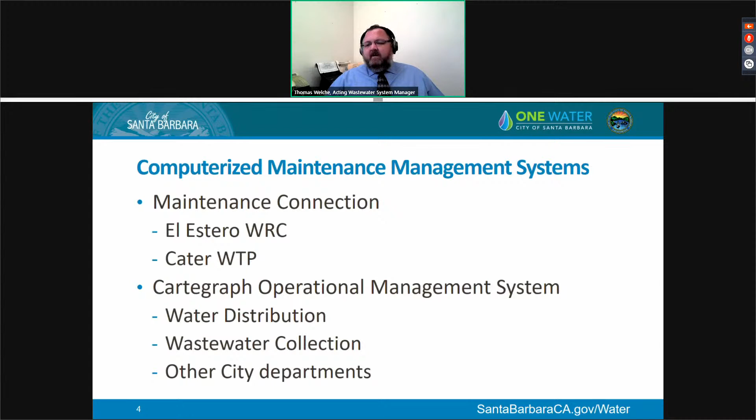As we began to develop these asset management practices in our work groups, we realized that our field crews could not effectively support their programs with their current job roles. It takes a really specific skill set when we need someone to be a CMMS administrator, an inventory manager, an in-house procurement specialist, capital program coordinator, and a maintenance expert. So the planner scheduler position was created.

The most basic function we need our planners to support is to maintain the records of what we own. Once we have that valid understanding of what we own, we develop programs to best maintain and repair it. Work orders allow us to track the who, what, when, where, why, and most importantly the how much around our work. Inventory control, procurement, and managing complex work plans are all about providing our field staff with the tools they need to be successful and work effectively.

Now that our programs have evolved into the most recent paperless forms, our field staff are able to collect much more data, significantly more efficiently, and with less manual data entry. That's freed up our planners to do much more analysis of the data and turn it into valid information that we can use to make smarter decisions.

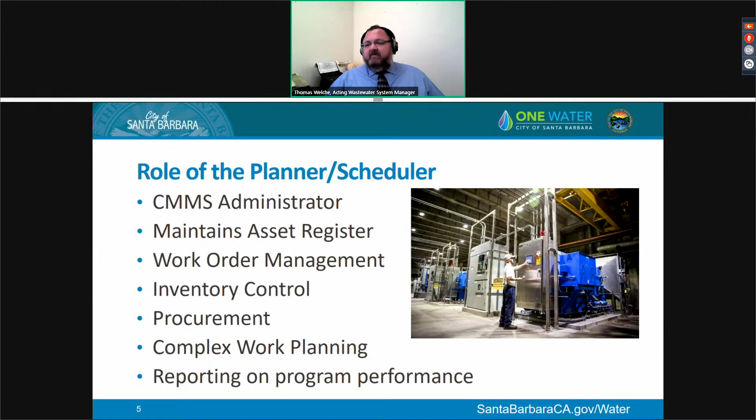At this point, I'd like to introduce Todd Heldoorn, the superintendent for El Estero. Todd's preparing to retire this year, and at his last budget meeting with Paul Casey, the city administrator, he was asked what his proudest accomplishment of his career was, and he said it was developing this asset management program. Todd's been a mentor to me in my career, and he's always been a champion of asset management since we started. So I can't think of anyone better to give you a history of how we got here than him.

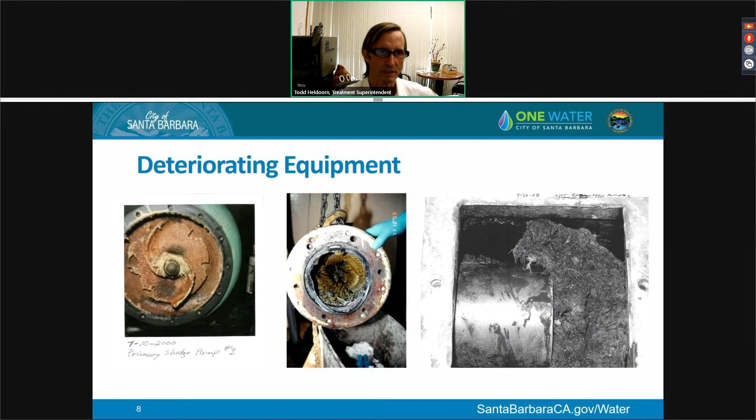This is a really common sight. We cleaned a lot of this stuff out, but we didn't have an upstream effective screening removal system to remove debris from the wastewater entering the plant. That was a serious issue at the wastewater plant and caused a lot of issues.

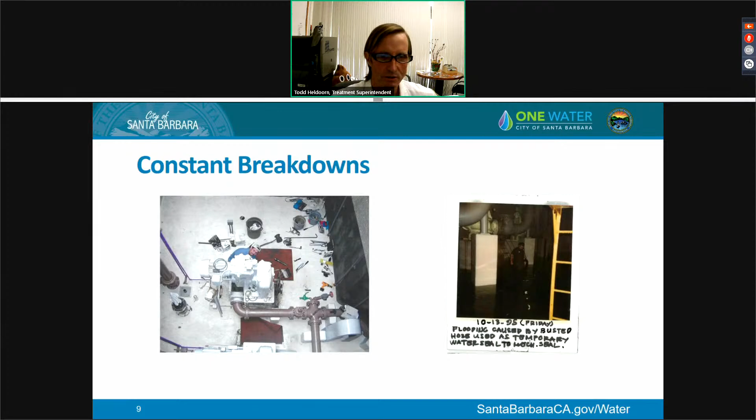This thing was fraught with what we call single points of failure. So if something went wrong with that vacuum hose or that vacuum, it was an emergency - we had to get those rags out of there. It was never ending, never stopping. Jim Armstrong, during this whole project upgrade process, asked me about it one time and said, 'Oh, that's that Rube Goldberg contraption, isn't it?' And I said, yeah, that's what we're working on.

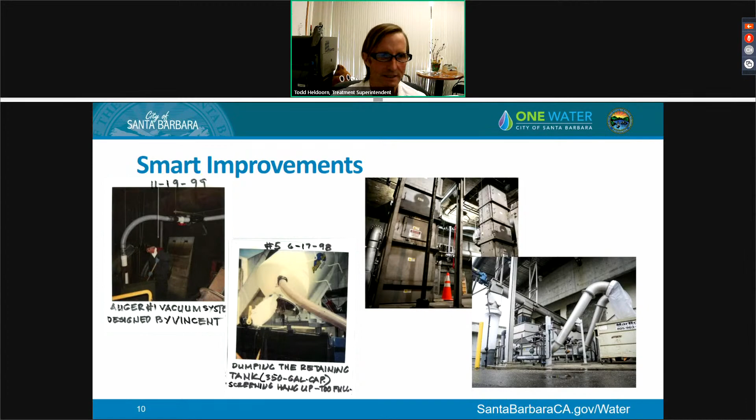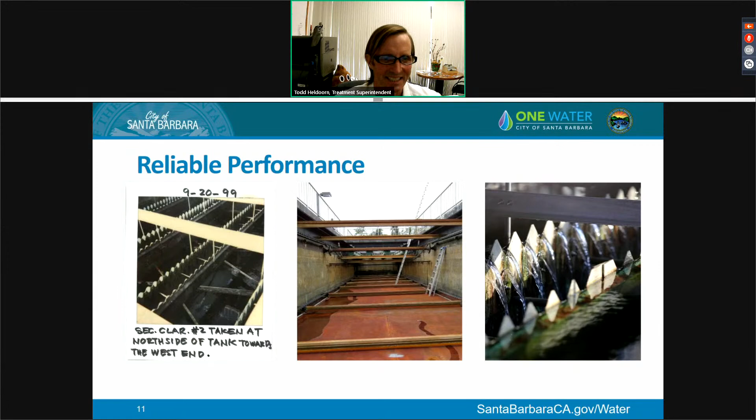And I guess to answer the question, why do we have asset management at El Estero? Back in the old days, El Estero was in dire straits. We needed a system to provide the tools and organization to lead us into a brighter future, taking us from a reactive run-to-failure mode of maintenance to a proactive preventative maintenance mode.

And I'd also like to thank Rebecca for having the foresight to hire the consultant to begin the asset management program at El Estero 15 years ago. That was great, and that's it for my slides.

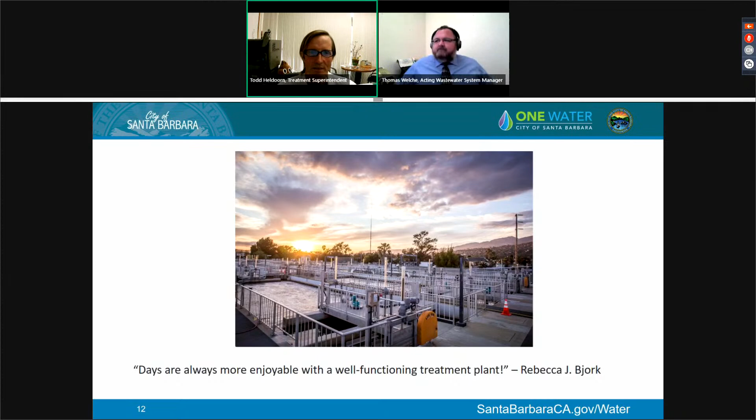But I'd like to introduce Thomas again. He's going to present on behalf of Steve Corral, our maintenance planner and scheduler, who couldn't make it here today, unfortunately. Steve is the glue that holds the asset management program together. He's a really hardworking guy, and he plays a key role in the successful operations and maintenance at El Estero and the 7 city lift stations. So I'll let Thomas explain further. Thank you.

Thank you, Todd. Before my recent role as acting manager, I spent the last 10 years as chief operator of El Estero. One of my key roles is to work with Steve, and I've been proud to work with him for the last 7 years that he's been a planner. He's, like Todd said, taken our program to a level that we only dreamt of all those years ago. Steve has an incredible attention to detail, a discipline and attitude that's so suited to this role. We really wouldn't be here without him.

So once an asset gets tagged in our system, we can start to track it. We can create maintenance tasks for it, develop spare parts lists, even order replacement units to have as backups. And now with mobile technology, our staff can be in the field, plug that equipment number into the system, and find all the history related to that piece of equipment, see how it relates to the rest of the system out in the field, create work orders, and look up parts.

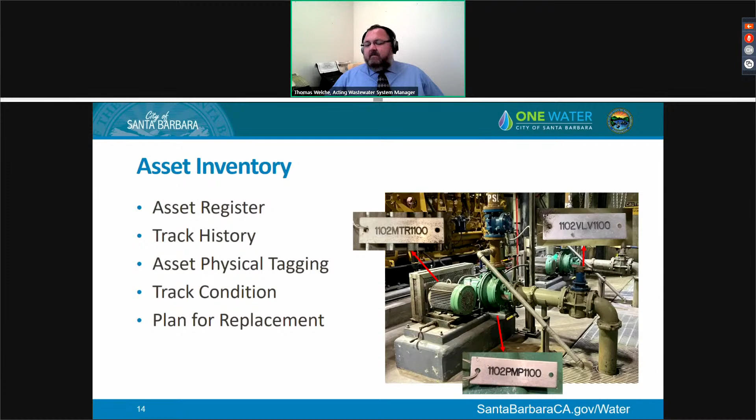Next slide, please. Work orders are how we plan our work and track all the costs related to the maintenance. Todd mentioned earlier, there's kind of two modes we're in, proactive and reactive, and so those are the two main types of work orders we have.

Proactive work orders can be oil changes, pump deraggings, or just visual inspections. These work orders are pre-populated with all the tasks required, parts lists, special tools required, time estimates, and other special instructions. This level of detail helps our technicians prepare for their jobs, and they can cross-reference our inventory to make sure they have everything they need to accomplish their work before leaving the shop.

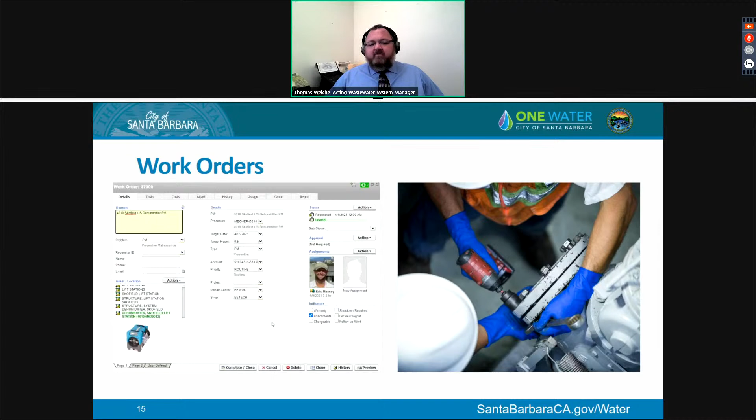Reactive work orders are created when issues are discovered, and they're important to track so we can fine-tune our proactive maintenance program. Next slide.

Inventory is where Steve has been spending most of his time recently, and really where he's had the biggest success improving our workflow. Like Todd mentioned earlier, it's not uncommon to have to go on a scavenger hunt when something broke down. You might need to go shopping, hit a couple stores, contact suppliers, or even rob parts off of other equipment to try and get a pump running again.

Now all of our critical assets have their spare parts identified and are linked within the system. Steve's built up our inventory so that we're never without a critical part.

Some parts have up to 6-month lead times, so figuring out which ones we need in stock and which ones we can rely on our vendors for helps us coordinate our workflow better. It was a huge undertaking to go through that.

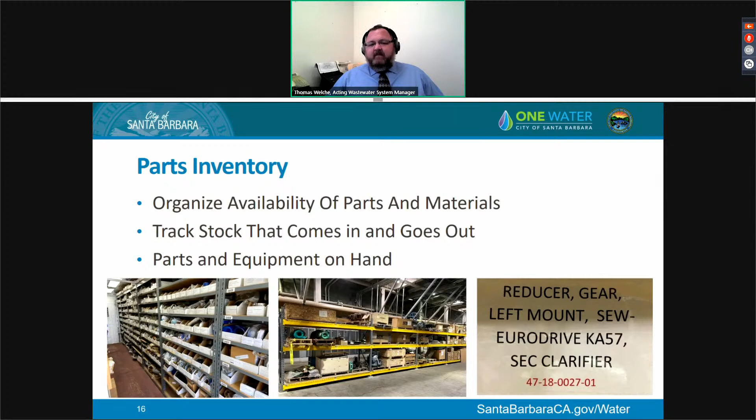We've also identified consumables, things that we use a lot of, that we need to keep in stock, and have developed a streamlined process for checking them out and maintaining their inventory.

Having a functioning asset management program has improved the reliability and performance of our equipment, reduced emergency repairs, and allowed the treatment plant to operate efficiently. Our operators and technicians are more effective in their jobs because they have the tools and information they need. And we've been able to develop the information required to plan successful upgrades like the Headworks project that Todd mentioned, or our secondary upgrades.

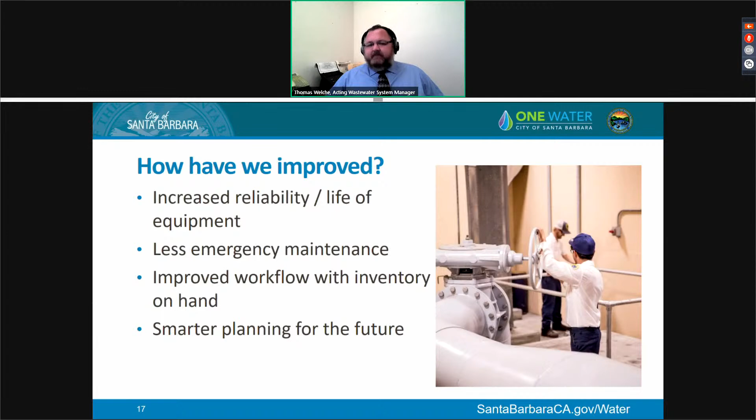At this point, I'd like to introduce Andrew Rhodes, Superintendent for Cater, and he'll take it up from here.

Thank you, Thomas. Chair Keller, Commissioners, Liaison Sneddon. Just want to talk briefly about the asset management CMMS implementation for the water treatment section. The facilities that includes are the William B. Cater Water Treatment Plant, the Ortega Groundwater Treatment Plant, and the hydroelectric plant. We are relative newcomers to a properly implemented and supported CMMS program, and hired our scheduler planner, Clark Simons, in January of 2020, so a little over a year ago, with a kickoff to the CMMS the following week.

I wanted to touch base on some of the benefits that we've experienced from El Estero leading the way, developing a top-notch CMMS asset management program. First, we use the same CMMS software, Maintenance Connection.

They did a lot of research and found a really good product that's really comprehensive. That software is hosted locally on the same city IT supported server, and we're actually able to implement it under El Estero's existing software license. So there's been some significant cost savings being able to do that utilizing the same software license.

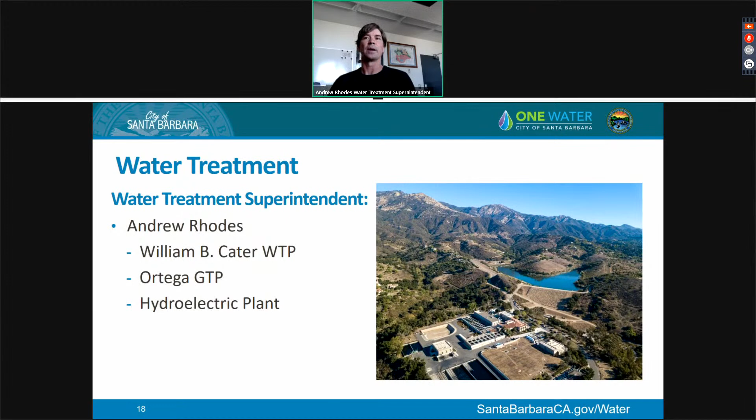Two aspects of the new system that I'm really excited about from my chair are the improved budgeting and better forecasting of upcoming expenses and the reporting capabilities that CMMS provides. With that, I'd like to hand it over to Clark Simons, the Water Treatment Section's Planner Scheduler.

My previous experience includes being a maintenance tech at Diablo Canyon Nuclear Power Plant. I've also worked at the Santa Barbara International Film Festival. I like to utilize new technologies into the maintenance planning here at Cater, and I really like to incorporate my photography into procedures in our database.

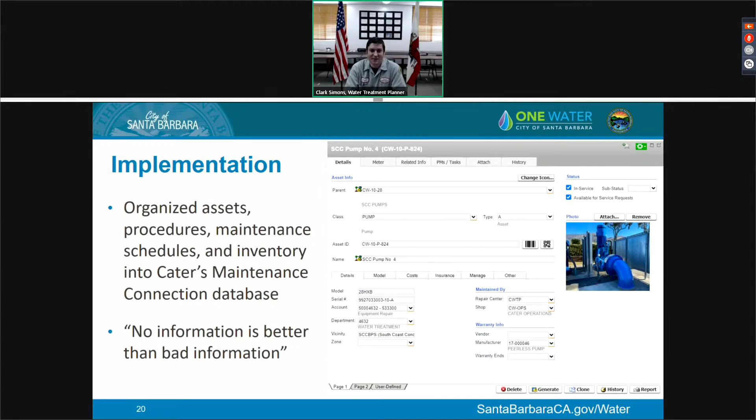So the impact of Maintenance Connection - it is great. We can now plan and forecast our maintenance well into advance in the next years to come. We can automate the scheduling for that maintenance and also create notifications for completed work orders or maintenance requests. We can assign and track work progress, which makes it very simple for our chief operator to assign work.

Our staff can provide real-time updates to the work that they do in the field. We can use the data that the staff collect to create relevant reports that present the data as useful information. Once we have those reports and information, we can make adjustments to our maintenance planning and scheduling.

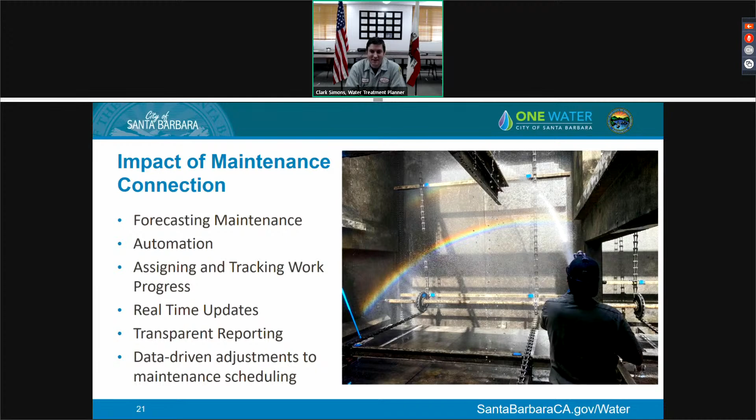So this photo is actually during our maintenance last year. We have Mitchell Chua, one of our operators, cleaning out the rainbows in our sedimentation basin.

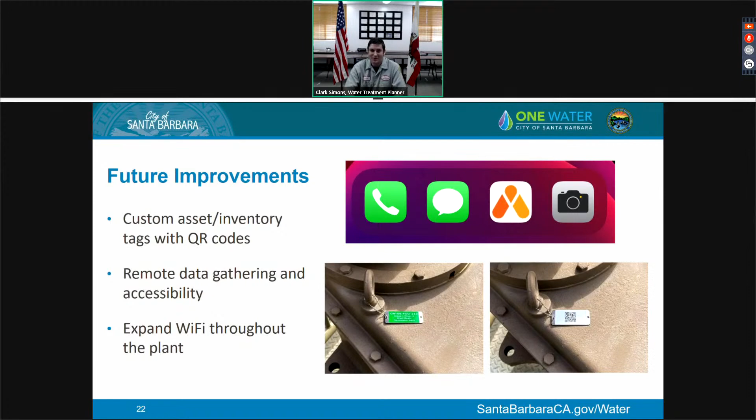And now I have the pleasure to introduce Water Distribution Superintendent Teresa Lancy.

Good morning, Chair Keller, Commissioners, Council Member Liaison Sneddon. I just put up some of the stats on our system. There's even more than that. We have many valves, meters, hydrants, an entire reservoir that we also maintain. Part of our asset management challenges involve looking at a system that is spread out throughout our entire service area and making sure we're able to track what we're doing when, and do that over a wide area as opposed to something more condensed like a treatment plant.

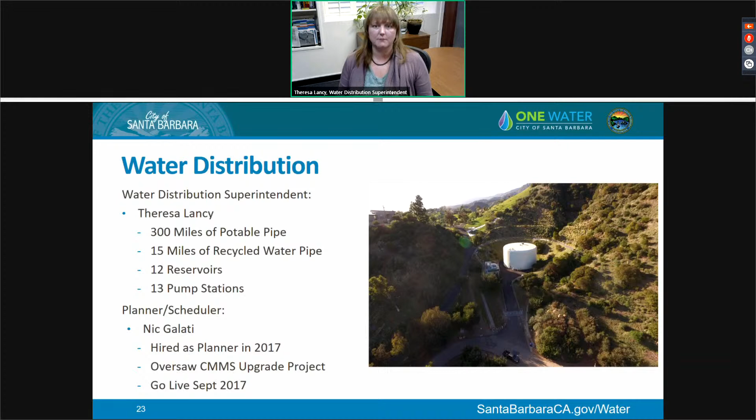This subject is near and dear to my heart because when I moved from the water supply group to water distribution, I served as their first ever planner scheduler. At that time, we were working on our first phase of asset management, looking at all of our facilities, our reservoirs, pump stations, groundwater wells, and seeing what condition they were in, looking at likelihood of failure, consequence of failure, and overall risk.

From there, we moved into looking at our pipeline assets and developing a risk-based tool that we're still running today to help us prioritize water mains for replacement for our capital improvement projects.

Then we moved to our overall water distribution infrastructure plan, which looked at the system as a whole and various operating scenarios, and how that impacts our assets, allowing us to come up with a 30-year long-term plan of maintenance and asset management needs over the long-term horizon. But I also want to emphasize this is a continuous process. We're going to continue asset management until people don't need water delivered to them anymore, and hopefully that's never.

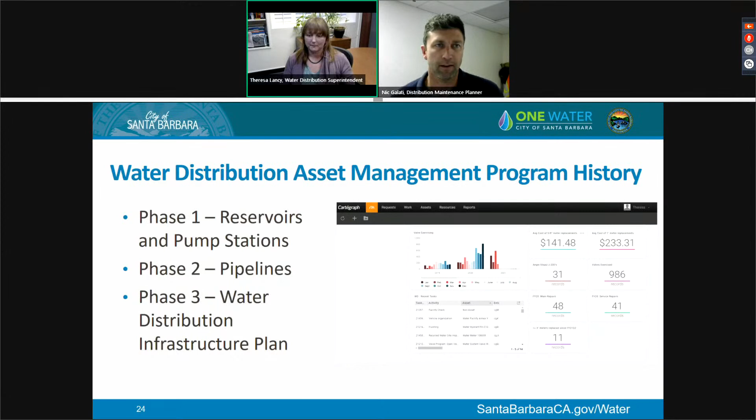Thank you, Teresa. Good morning, Chair Keller, Water Commissioners, Liaison Sneddon. My name is Nic Galati. I'm the Water Distribution Maintenance Planner. I've been with Water Distribution for about 8 years and in this position for the last 4.

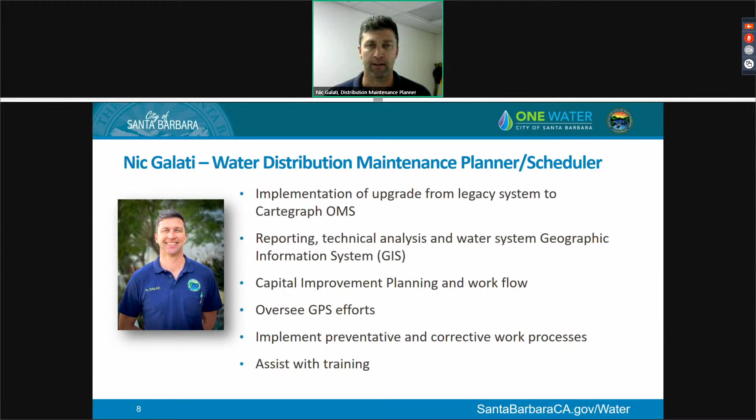I've assisted with the implementation upgrade within the CMMS. Along with the analysis side, I assisted with the customization of system structure and automations. I ensure asset creation and scope of work is captured for CIP planning. I also work with various city staff to make sure GPS data of water distribution assets are properly collected during construction projects for mapping updates. And I regularly meet with different technical groups to review and refine workflows, as well as assist with training.

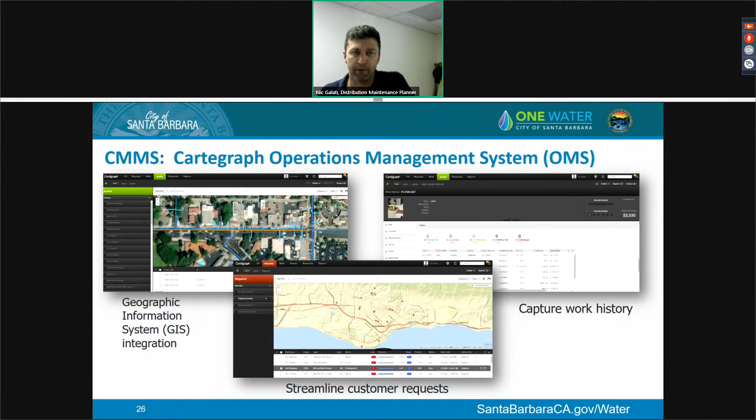Another functionality of this is to be able to capture the work history on assets. It really helps crews solve issues when you're able to see what was done on a meter, or when that pump was maintained last, or when the engine or motor oil was changed last, and it really helps us capture that institutional knowledge of past work.

This system has helped us join the paperless revolution. On the left, we used to have to write daily tasks with our times and our equipment, very time-consuming to produce, as well as reference the work that we did. Trying to go back and figure out what happened six months ago meant digging in a box, which was kind of a nightmare. But now that's been replaced with tablets and smartphones, as you can see in the center picture. We can easily organize tasks, send them to our operators, and they have all that information in one place, and we can easily pull up a report on that, as you see on the right.

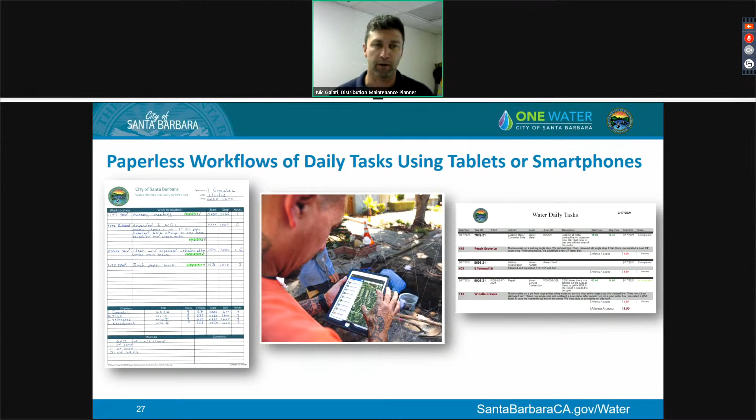Another process that's become digitized for us is how we update our water system maps. Not too long ago, we used to mark up printed maps with pen and paper drawings, with a possibility of information being lost or misinterpreted. Locations weren't that accurate. It just wasn't a very good process.

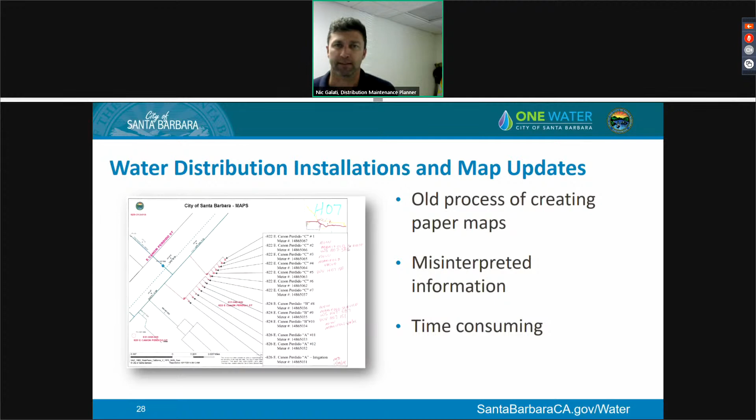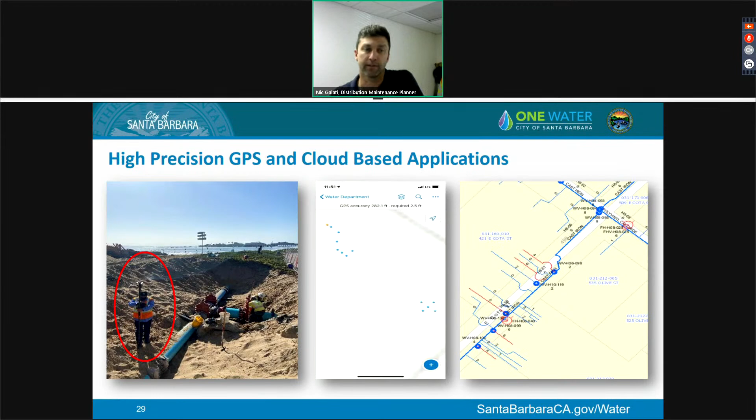As tasks are completed in these work orders, we have automations that help produce water loss and outage times based on when a lot of these tasks are completed, so that we can report on these water losses as a regulatory requirement.

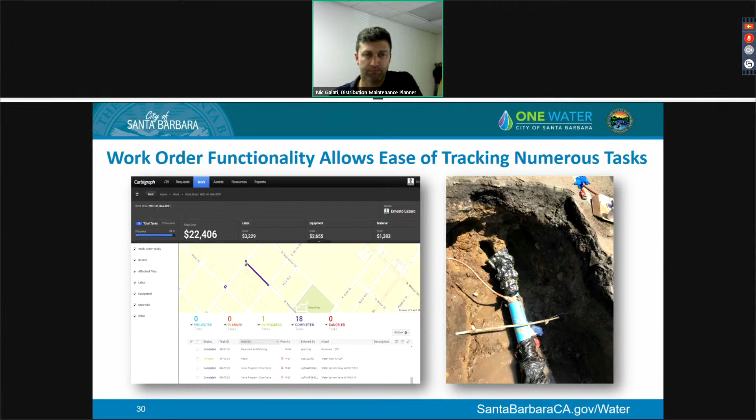Another way we're leveraging technology here is through systems integrations. We've integrated our billing system with OMS. Someone might come out and see their water meter full of water, and they might forget to call in and put in a request, but our water meter readers can go out there, see that, and enter that issue into their handheld, which can create a task in our OMS for our field crews to respond. Then hopefully by the next time that person goes out to their water meter, they see a nice, clean, resolved water meter. So we're actually able to perform these functions through these integrations, and that's been a very big help with us.

We kind of hope to see more of that in the future, as OMS is very integration friendly. So in conclusion, these systems aren't just helping us manage our assets, but kind of as the name implies, helping us manage our operations and really helping this division become more proactive. With that, I'll turn it back over to Thomas.

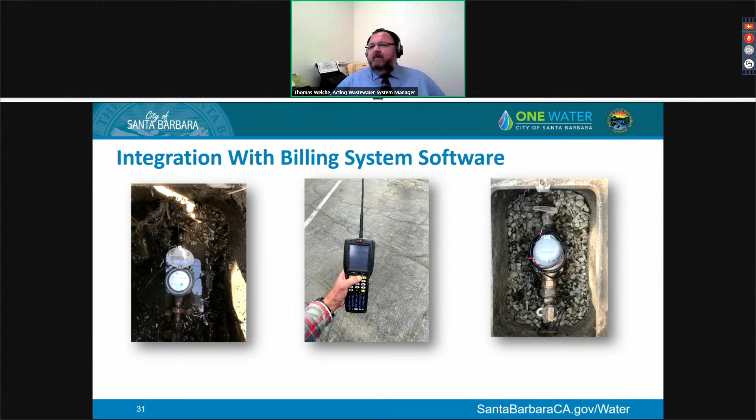Thank you, Thomas. Good morning, Chair Keller and Water Commissioners. My name is Robert Johns. I have been the wastewater maintenance planner scheduler at El Estero since 2019 for the collection system for the city of Santa Barbara. The main focus of my job is to quality control the cleaning findings reported by field staff, as well as review additional information to ensure the collection system is cleaned accordingly.

To do this, I review available cleaning data, acoustic scoring, and any available visual inspection information, and research past history associated with the main. These additional methods of validation I use can help me assess and verify that each of the mains are assigned on the appropriate cleaning frequency and program.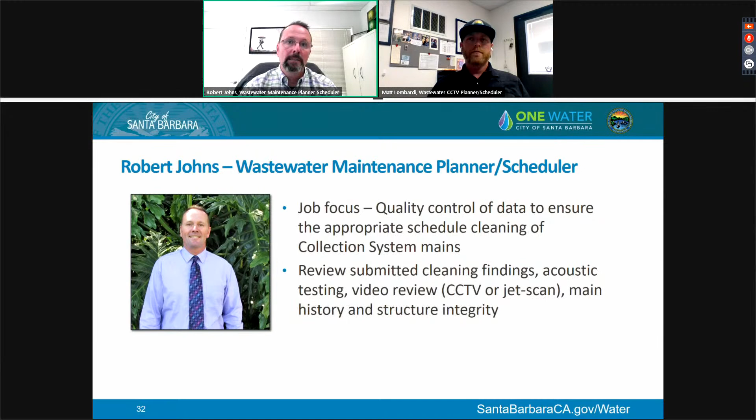But before I go any further into my role, I would like to introduce Matt Lombardi, who is also a maintenance planner scheduler for the collection system here at El Estero, whose focus is on CCTV inspection data and CIP projects. Next slide, please.

Thank you, Rob. Good morning, Chair Keller, Water Commissioners, and Liaison Sneddon. My name is Matt Lombardi. I'm the wastewater collection system CCTV planner scheduler, and I've been with the city for 15 years, and my current position in the last 4.

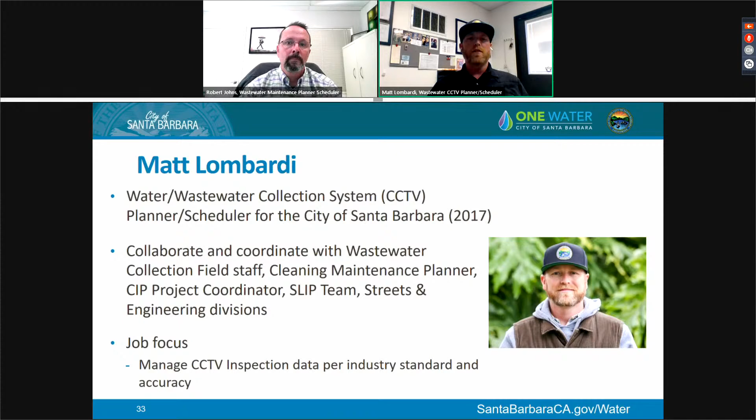I oversee our CCTV program, and in my position, I work closely with wastewater staff and other city divisions to help prioritize and manage the CCTV workload for future capital. My job focus is to really manage the CCTV inspection data and confirm that the data being collected in the field is coded to a certain standard and is accurate. Next slide, please.

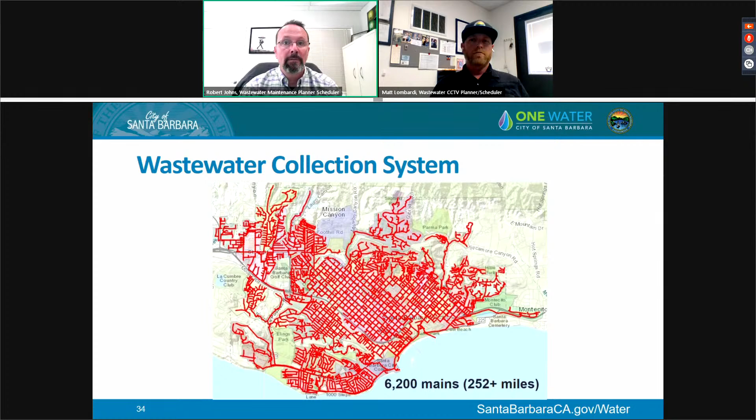Due to not being able to accomplish the task of cleaning the entire system every year, we've created a cleaning program that assigns each main to a cleaning frequency and a program to optimize this task. Next slide, please.

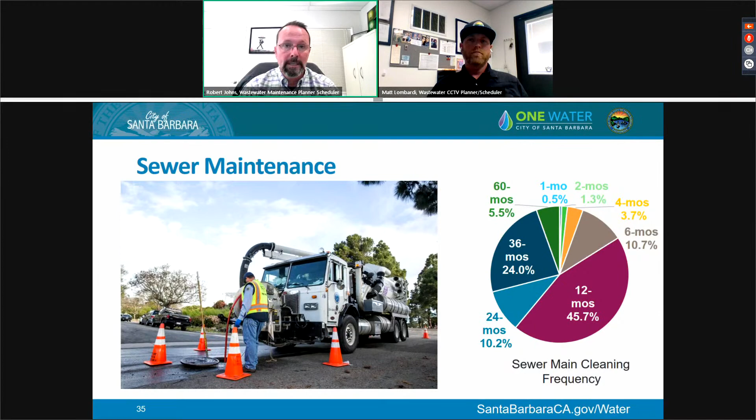This is extremely important to consistently improve our service to the community of Santa Barbara and can help protect the environment from sanitary sewer overflows, also known as SSOs. Next, please.

The transition from Cartegraph Navigator to Cartegraph OMS has allowed the planner scheduler to invest more time and effort into reviewing and analyzing the data rather than creating and tracking the workload. This has enabled every planner and scheduler, regardless of which asset they assist to manage, more time to critically think and make better decisions regarding asset management. Next slide, please.

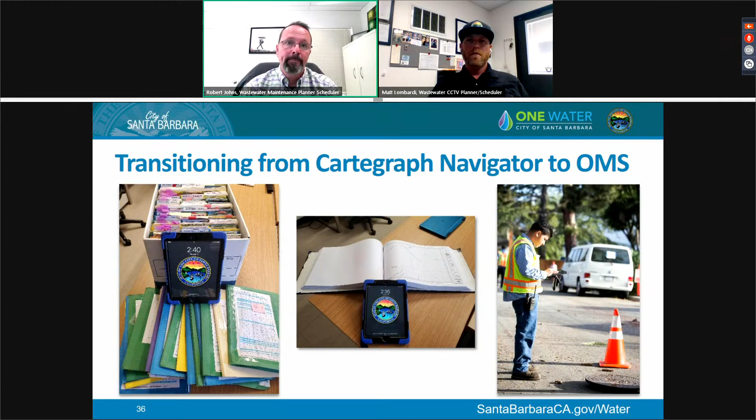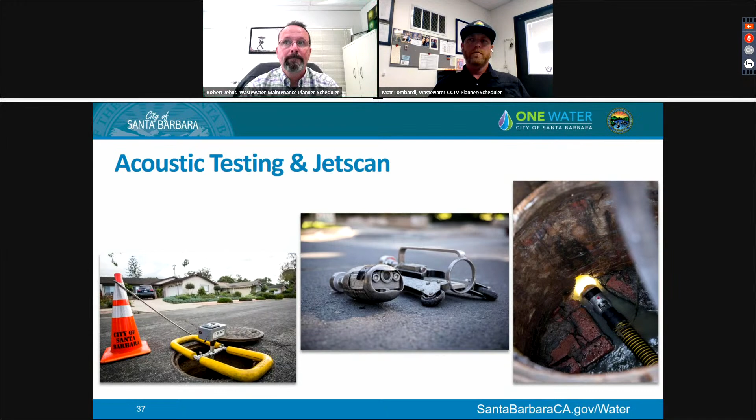The city and our CCTV operators use the industry standard National Association of Sewer Service Companies (NASSCO) Pipeline Assessment Certification Program, PACP. This is a pipe defect coding system for recording defects identified during a CCTV inspection. It provides the most accurate and high quality data and helps for future CIP planning purposes. This method is coded in the field and inspections are synced daily to our IT Pipes cloud database.

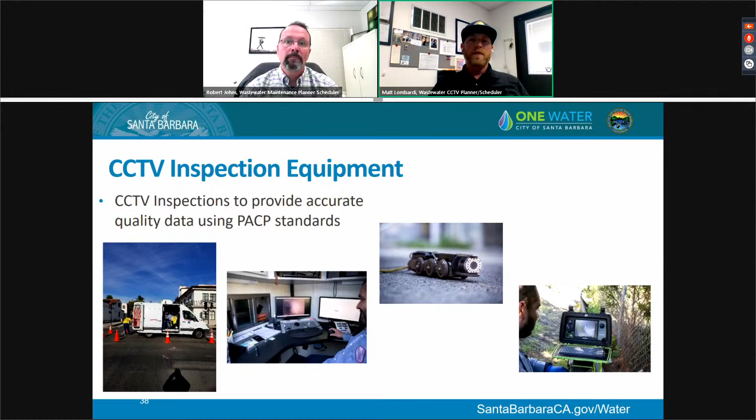CCTV management software: IT Pipes is our CCTV capture software used by field operators to perform condition assessment using the PACP standards. The CCTV results are stored and reviewed on our centralized cloud database, which provides easy access to retrieve and review the data.

InfoMaster is our decision logic tool. It uses the overall PACP data collected in the field and determines the best course of action for each pipe, providing a list for future capital improvement projects. The focus and importance of my job is really to ensure the CCTV data submitted is to the industry standard. This overall drives and helps prioritize data for the decision-making process, future CIP projects, and provides for a more reliable system to extend our budget.

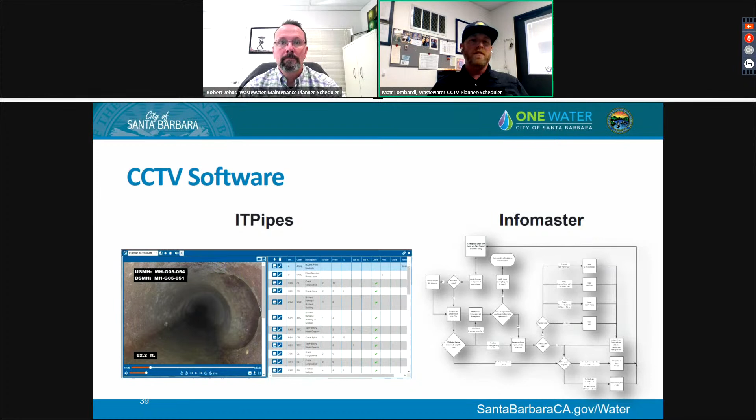So in closing, Cartegraph OMS allows the City of Santa Barbara staff the ability to improve how we manage our assets through teamwork by the collaboration of efforts amongst coworkers, the improvement of our customer service to the community by responding to community needs and demands, and to safeguard the environment by keeping the streets, ocean, creeks, and waterways clean. The City of Santa Barbara collection team has shown how dedication, hard work, and focusing on goals to improve asset management can lead to impressive results.

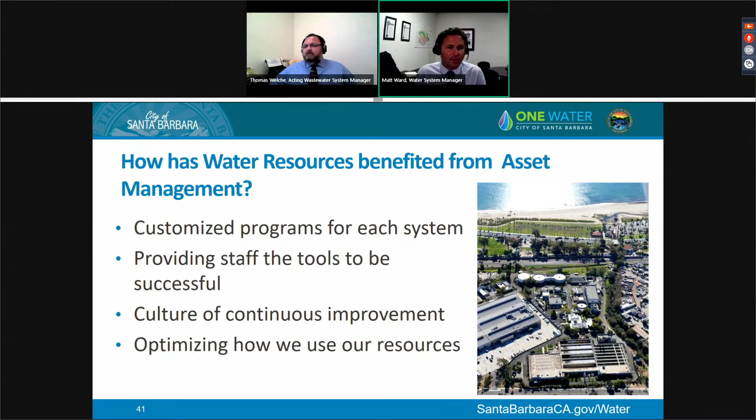Thank you very much. This was a great overview, especially starting off from where we were many, many years ago to where we are, which is amazing, how much we've gone forward. It's really great to see all of this.

Commissioner Cooney: I was just wondering with the CCTV data, that seems like it would be a lot of information to store. How do you guys make the decision about that raw footage? Do you keep it for a certain amount of time? Does it depend on what the findings are for each specific data package? That just stood out as a potential complicating decision.

So we've kept everything from 2009 and previous. The data wasn't coded as accurate, and over the past few years we've really narrowed it down and used those PACP standards. Everything is really kept for capital, so it's never really getting rid of anything. We constantly just keep stacking that data. As we get new data, we may push out old data to just kind of look at where we started and where we ended, but it's all stored.

Interesting. Thank you. Thank you, Matt.

Councilmember Snedden: Thank you, Chair Keller. Is it appropriate now to make a comment, or is it just for questions at this time? Oh, please do so. I just want to thank you.

All right, so our second item is a presentation on the forward lateral software services. Ms. Fair.

Actually, I get the pleasure of introducing this. Good morning, thank you very much. Good morning, Chair Keller, Commissioners, and Liaison Snedden, I'm Kathy Taylor, the Water Supply and Service Manager.

Our sewer lateral inspection program was created in 2007. This was in response to an increase in private and public sewer spills that were caused by privately owned sewer laterals. Our sewer lateral inspection program continues to grow and develop in response to the community's needs.

We are focused on making this program very customer-centric by streamlining our processes and assisting, educating, and informing our customers throughout the process.

So we're really pleased today to introduce a new software platform that we've been testing. We plan to make it a standard for the program, and we think that it will be another helpful tool for our customers. With that, I'd like to turn the presentation over to Gaylen Fair, who is our Water Quality Superintendent.

Thank you, Ms. Taylor. Good morning, Chair Keller, Commissioners, and Liaison Snedden. As Ms. Taylor mentioned, we will be talking about forward lateral today. Next slide.

Just a little bit of background on what we're going to be discussing today, some background on our sewer lateral inspection program. We gave you guys a presentation last week, so we'll just touch on some of those things again, and then we'll go into forward lateral. Next slide.

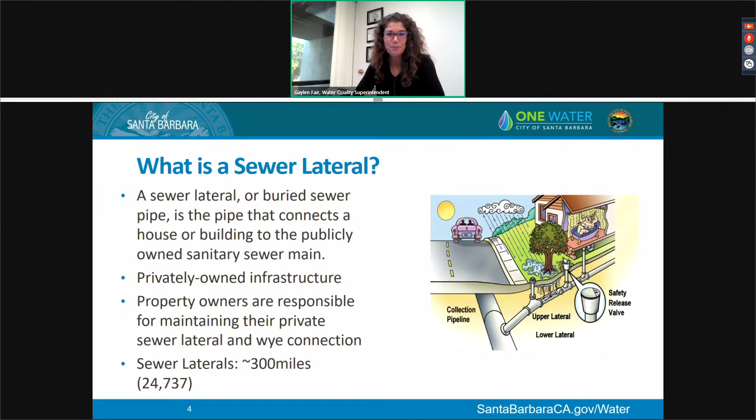Next slide. A little bit about the SLIP history. It was originated in 2006, but the program didn't go in until 2007, as Ms. Taylor said. It was really to address the failing laterals and increase public awareness to maintain their own private infrastructure. The program requires property owners to inspect their private laterals under certain conditions, and I'll go through those in a second.

We really are listening to the community and what their needs are in response to our program. It is a very aggressive program compared to other agencies, but we really are looking to have a clean environment, not have any sewer spills, private sewer lateral spills, et cetera.

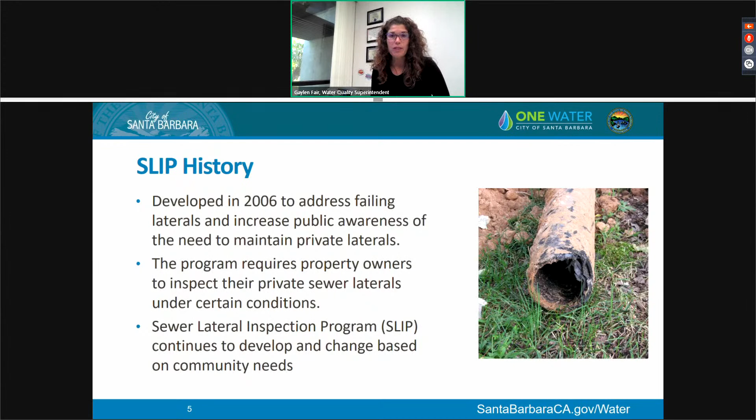So we're listening to the community and what their challenges are when they do get a letter, when they are trying to figure out their repair options. We're here, we're listening, and we're changing our program and making sure that everything is addressed. Next slide.

So inspections are triggered by some of the following, actually these are all of the things that inspections are triggered by. Permit initiated: if somebody has applied for an ADU, if they are adding 400 square feet or more, or if they're adding 2 or more plumbing fixtures to their property. And the reason this is important is we really want to make sure that a property owner's lateral has enough capacity.

The condition is in good working order to be able to take on that additional capacity. Another trigger is a private sewer lateral spill. If that occurs, clearly something is going on in the lateral. So we want to make sure that gets inspected and the problem gets repaired.

Another item is a defect observed at a connection during a city main inspection. Mr. Lombardi had spoken about all of the CCTV data that we do on our sewer mains, and the picture in the middle there is actually from one of our cameras as we were inspecting a sewer main. So we see this big root ball and we know that it's coming from a defect in a connection. In that case, we will then send an inspection letter to a property owner saying, hey, we've noticed a defect at the connection.

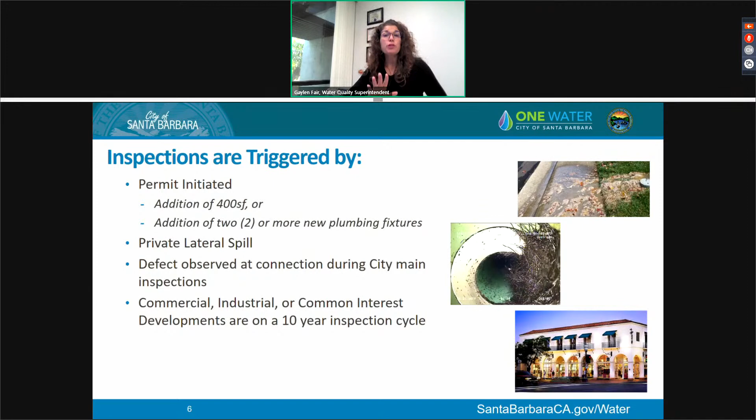Next slide. So again, a reminder of what the SLIP process is. You receive an inspection notification letter based on those triggers I just spoke about. Property owner will hire a city certified CCTV inspector, and we have a list of those certified inspectors on our website.

All of the plumbing inspectors who have gone through our certification program are on that list, and that really gives us a chance to tell them what we need to see in those inspection videos. The plumber will then send the video to the city in some way, and we will review it. If any defects or repairs are required, we will send a repair notification letter. Property owner will then hire a plumber or contractor to do the repairs, and upon completion, they will be issued a certificate of compliance.

So the area where this Forward Lateral software is really going to benefit us is in between the inspection letter notification and getting the CCTV inspection completed and submitted to the city. That second bubble there, that's really where the software is going to benefit us, the property owner, and the plumber. Next slide.

As it sits, we are trying to create a smoother process. It is a disjointed process currently. It's moving better, it's going to a better place. But historically, we have required an inspection form and a video for submission. Typically that is a paper form, a thumb drive, or a USB. We have moved to only digital submissions now, but still need that inspection form and that video.

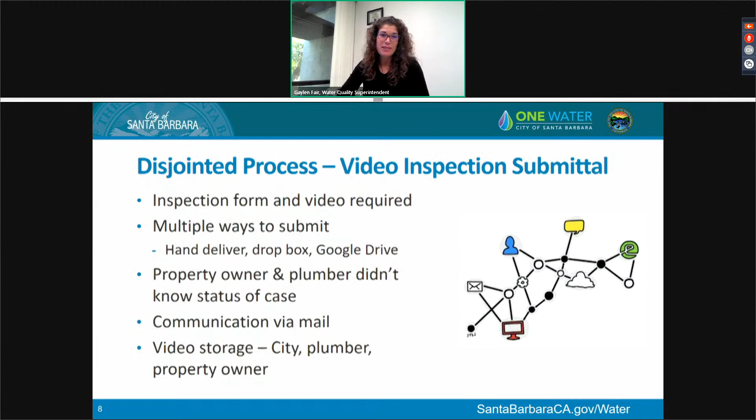So again, this process of the video inspection submittal has just been very chaotic in the past, and we are really moving towards a much smoother process, and Forward Lateral is really the software that will be able to do that. Next slide, please. So we'll talk about Forward Lateral next.

I'll go through some of the benefits and then we'll give you a demo of the software. Forward Lateral is an interface between the city, the plumbing contractor, and the property owner. It's a web-based program for uploading and reviewing CCTV inspections. The really unique part is that it includes the property owner in the process. Other software used for these programs, like OMS or IT Pipes, is really internal to the city. Forward Lateral includes the property owner and the plumber in that process, which is really beneficial to all parties involved.

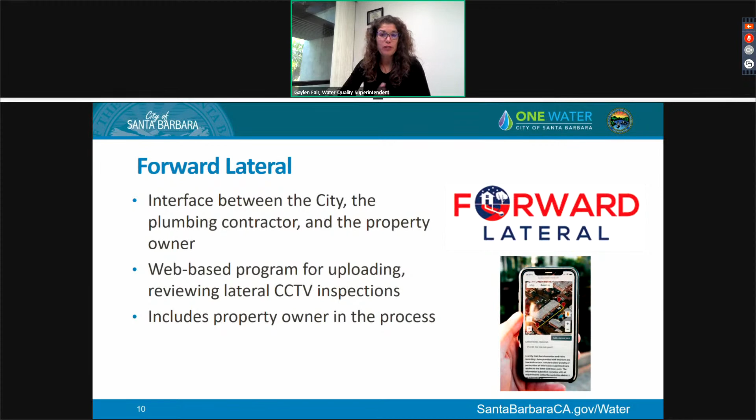So, a quick history of Forward Lateral. It was developed to assist everyone involved with the sewer lateral inspection process: the property owner, the plumbing contractor, and the municipality or sanitary agency. Each of these parties has different needs, but all of their needs are being met through this software.

I'm going to talk about the benefits of each, and then we'll jump into the demo. Property owner benefits - this is really what we're excited about - is that the property owner is involved. I can't say that enough. Other than staff or the property owner picking up the phone, they haven't really been able to be involved through every step of the process. Forward Lateral allows for much more efficient communication.

When a plumber submits a video, the property owner gets a notification. So they do their inspection, and the property owner now knows the video has been uploaded to Forward Lateral - they'll get a notification. Once the city has reviewed that video, they'll get a notification. And then we can also send repair letters through Forward Lateral and through snail mail to get that communication out to them.

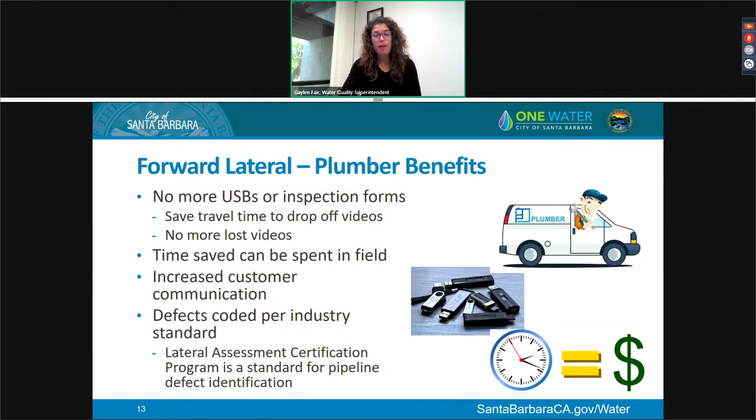And finally, the municipality benefits. Forward Lateral is a much greener option. Going back to the inspection forms and USBs, that was a big headache for everybody. So no more paper inspection forms, no more USBs. Forward Lateral has all of the questions and criteria that were on the inspection form built into their software - the plumber just goes through and answers the questions, checks boxes. So we no longer have to keep track of a paper form, and we no longer have to worry about what to do with USBs once we view the video.

We can now receive all of our video inspections in one location instead of looking for it in Dropbox or Google Drive. We now know everything will come through Forward Lateral, and we have one location to access all of our videos.

The defects, as I mentioned, plumbers are coding using the industry standard. So instead of staff having to go through and write it up, they're now grading the paper. The plumbers have already called out the defects, and now we just grade their work, so to speak. This really gives us consistency across the entire program, so we can show that the laterals are coded the same between laterals.

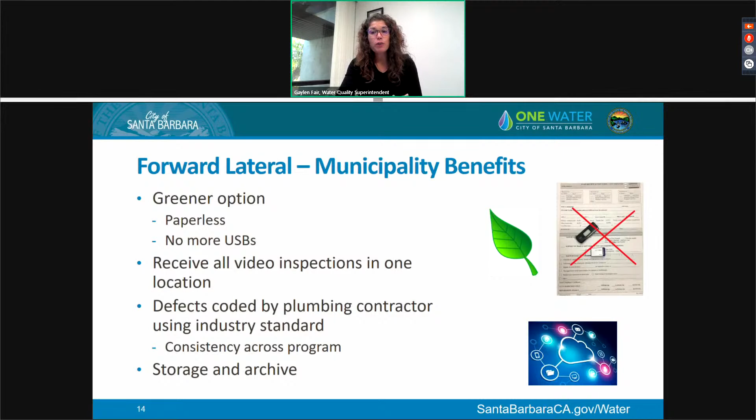Next slide. So with that, those are all the benefits. As you can tell, a lot of them overlap. But I would like to introduce Jesse Aizenstat. He is the owner of Forward Lateral, and he's the one who created it. So he's going to walk you guys through the software.

Hello everyone, thank you Gaylen, commissioners, staff. It's an absolute pleasure to be here today to do this for you. I started out—I'm from the software world and the real estate world.

I'm not an engineer. I was permitting an ADU on the west side a few years ago, and I had my first inspection, which was done as Gaylen showed. The first inspection, I guess, was lost—the plumber blamed the city, the city blamed the plumber—so they had to come back and redo it. Then they did another inspection, and I get something in the mail a few weeks later that says—I actually still have it, coffee stain and everything—that the thumb drive didn't play. So on the third inspection, I'm sitting there in that same driveway, you saw the picture of me holding the iPad a few minutes ago, and I just had my moment.

I thought, you know, I'm 35, I'm from Santa Barbara, and I know software. I can do something about this. And that's what Forward Lateral is. That's what I'd like to give you a crash course on right now.

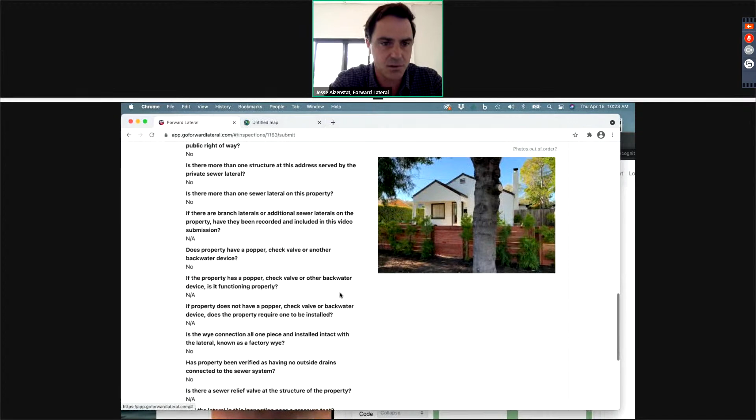And then here's the inspection form with our map. And it's just a really clean, forward-facing way. Here's all our questions to understand this for the property owners and also for the plumbers to make sure we're submitting good data. Without identifying the material type, you actually can't even submit the inspection. So it really helps the plumbers just gather good data and go from there.

So we would save and submit to the municipality. And then when that happens, the property owner and plumber are emailed.

So here I've just logged into the city side. Basically what the city does is they have a dashboard that looks similar. They see all these inspections here in different states, needs additional work, pending review, approved, the date, who did it. And then let's just go into this one, which says pending review right here, which means it's time to review this thing. And here we go.

This is what your average inspection likely looks like. Off the bat, I can see who the owner was, who the inspector was, meaning the plumber. You can see the video, you play it, you can add your own observations, you could look and see what the inspector did. So it's kind of this plurality approach where we're adding together the observations.

And this is so critical for a forward-facing tool. You could disagree with them if you'd like, it turns a different color. You can see the inspection form. Okay, our eyes are used to seeing this by now.

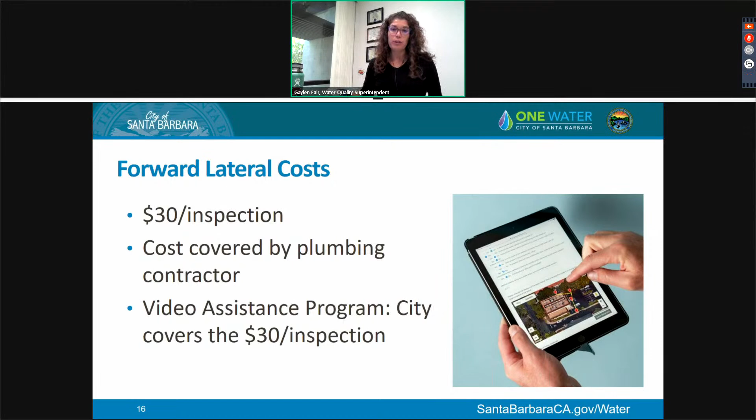Per inspection. Next slide. So again, I'm just going to go over the benefits again because they're great for everybody involved. It's a transparent process. It saves time. It increases efficiency, enhanced communication between all parties, and it stores the information in one place, which is accessible to everyone. Next slide.

So next steps. We will be going to City Council on May 11th. We're going to give them an overview of SLIP on what we have done over the last several years, very similar to what we presented to you folks last month. And forward lateral will be included in that presentation. Next slide.

So today we are looking to receive feedback from the Water Commission on the use of forward lateral software. So I will take any questions. And if you have any questions for Mr. Aizenstat too, he's still here.

Thank you very much, Ms. Fair and the whole team for this presentation. Welcome to the 21st century. I mean, this is really great. I think you guys are doing a really nice job of updating this and making it so much easier for people to track their information, see the information, much more transparency and everything. So I really like that.

Do we have any questions? Yes, Commissioner Davis. It's really a comment rather than a question, because I think the presentation was fairly explanatory. I guess in one word, wow, I really, really love this idea and the concept.

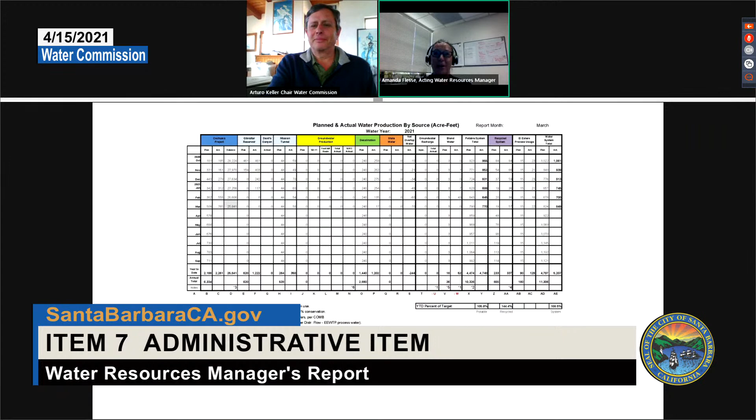Good morning, Chair Keller, Commissioners. I'm excited to present the manager's report. You get these reports and graphs every month, and so Dakota, Corey, and myself are here to explain these graphs and details, not only to some of our new members, but also because we are publishing this report with the meeting minutes. So for the public, if they are looking at these reports and wondering what they all mean, we have the opportunity to explain them today.

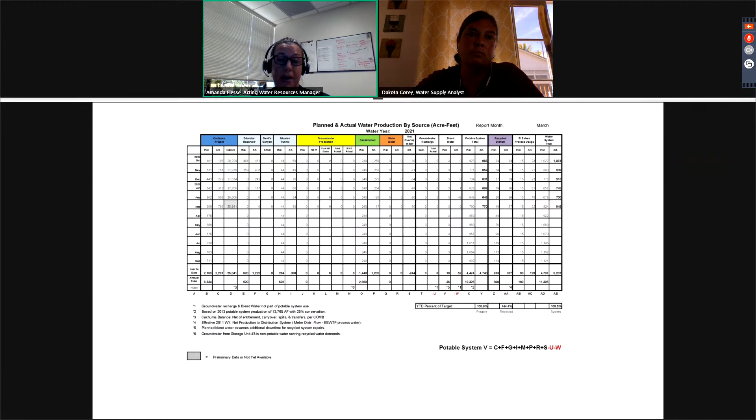So with that, we will start with our presentation and explanation of all these graphs. I'm going to hand it over to Ms. Corey for the first portions of explaining these graphs.

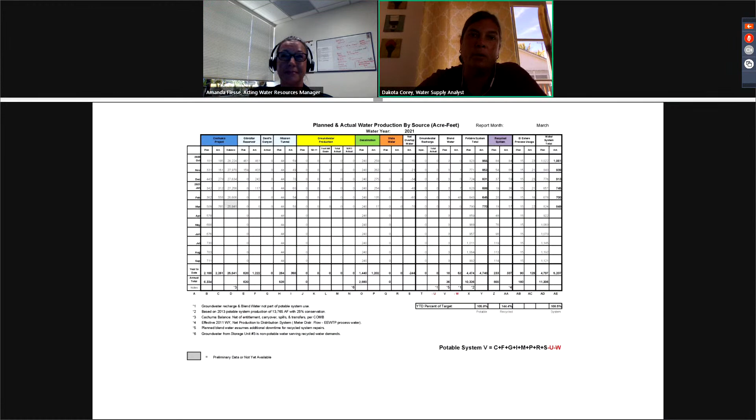Thank you, Ms. Flesse. My name is Dakota Corey, and I'm the water supply analyst for the city. As Ms. Flesse described, I'm just going to do a quick walkthrough of some of these reports that we provide each month, both for the public and for Water Commission's benefit. I also wanted to let you know that we will be coming back to Commission next month with a full water supply update. You heard Ms. Taylor mention in her report that the allocation on the state water project is tied for the lowest on record at 5% this year.

So you're probably hearing out in the public that the state is looking at drought conditions. We've had record low precipitation, and these reports really help put that in perspective for the city itself. I'm just going to point out where you can find some of that information, and like I said, I will be back next month with a more detailed report on our water supply situation. So this first report is our planned and actual spreadsheet. At the beginning of each water year, I project how much of each of our sources of water we'll be using to meet demands.

Each source, which is color coded, has both a planned column and an actual column. The plan shows how we expect to use that source throughout the water year. And then each month I calculate our actual production of each source, and we can compare and see how we're tracking through the water year.

The most important piece of information on this report currently is the fourth column from the left, which is our balance in the Cachuma project. You'll see there's a gray square there - the font is probably pretty small in this presentation - but what that shows is the city's current storage of Cachuma water in Lake Cachuma.

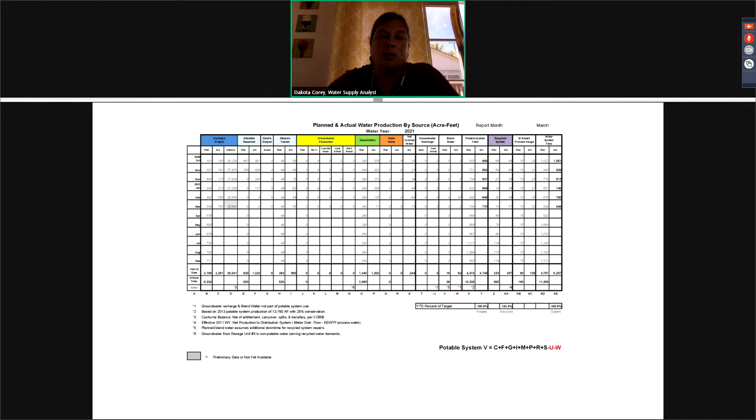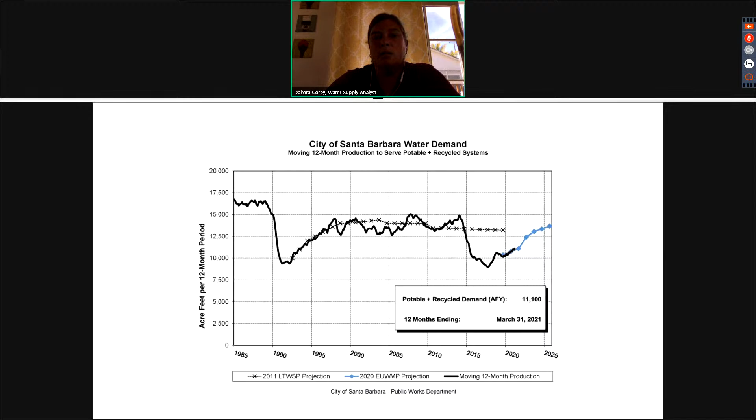Something interesting about gallons per capita per day measurements is you don't really want to compare them community to community, because there are a lot of factors that go into them. For example, in Santa Barbara we have a lot of workers that commute in for work, maybe not so much right now during COVID, but from other areas. We have people that live in Ventura and work in Santa Barbara. We also typically have high tourism numbers, and all of those workers and tourists aren't counted in our population. Our population is just our city resident population. So we could have a higher overall water use per person in the city, because all those people coming in for the day are using water as well.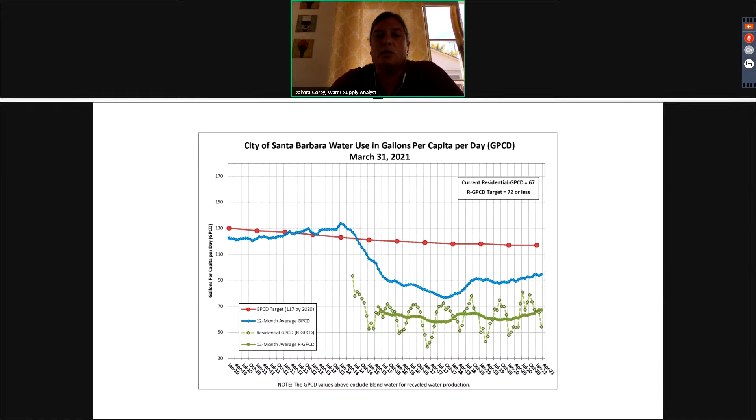We're currently sitting at 67 gallons per capita per day for our residential customers. Our target is 72 or less, so we are meeting that target. We don't have new state regulations yet - this is going to be a component of regulations moving forward from the state, but they're still promulgating what those targets will look like. Right now we're tracking it so we understand where our customers stand, and as the state rolls out new regulations, we'll be able to plan accordingly.

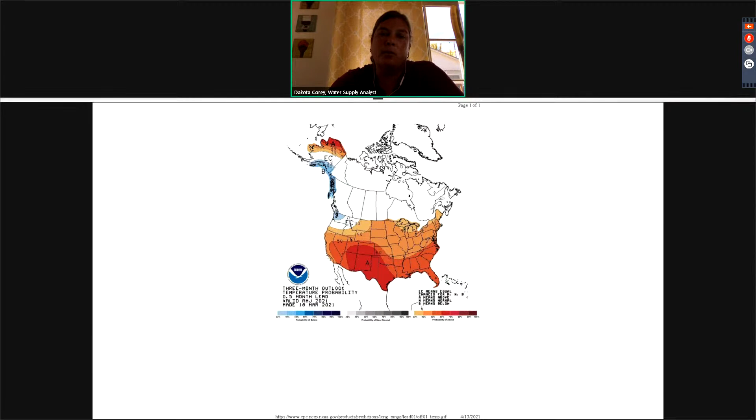So the overall picture is we've had very low rainfall this year, but we have an expected hot summer. Those are conditions that are shaping up to look like drought conditions. But like I said, we do have a lot of water stored in Cachuma right now, so the city is sitting in a pretty good place, and I will provide a more detailed analysis on that next month.

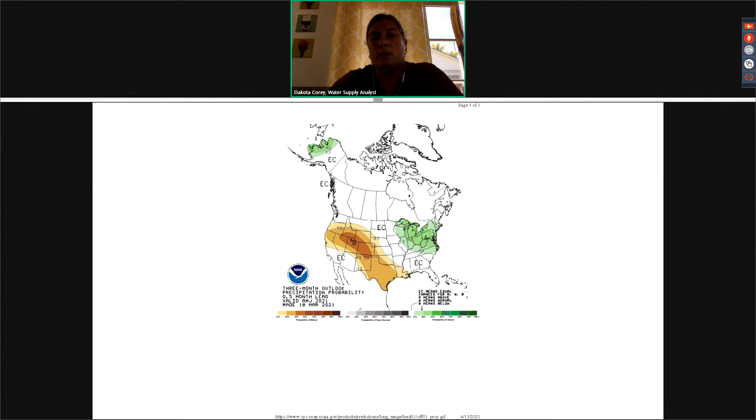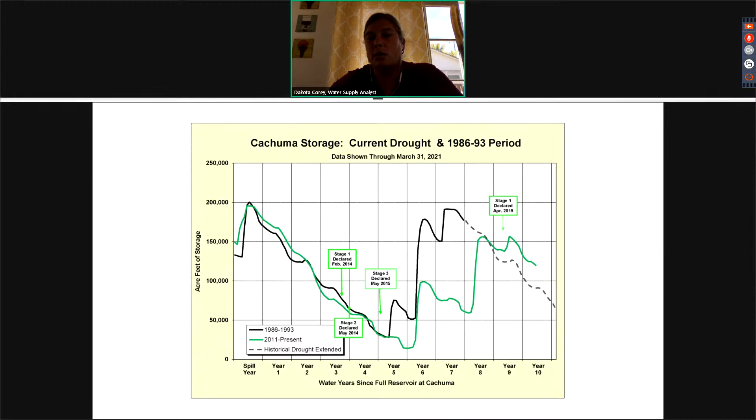Ms. Flesse, I believe that's the end of my slides. You may take over. All right.

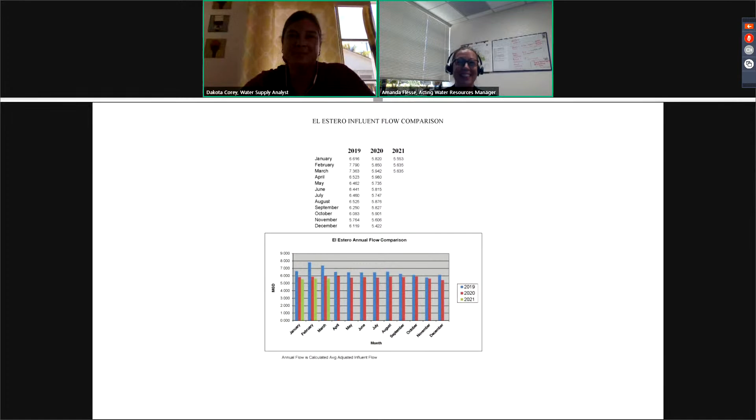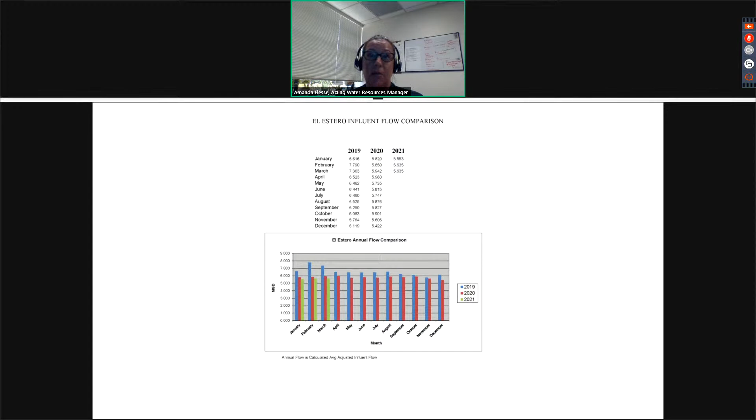Thank you, Ms. Corey. So the remaining slides are more of the El Estero slides. This gives you a history of how much flow is coming into El Estero. What's really interesting to us is the COVID impacts—you can tell from '19 to '20 how much we reduced the amount of flow coming into El Estero. With everything opening up, it'll be interesting whether or not we return back to that 2019 inflow level.

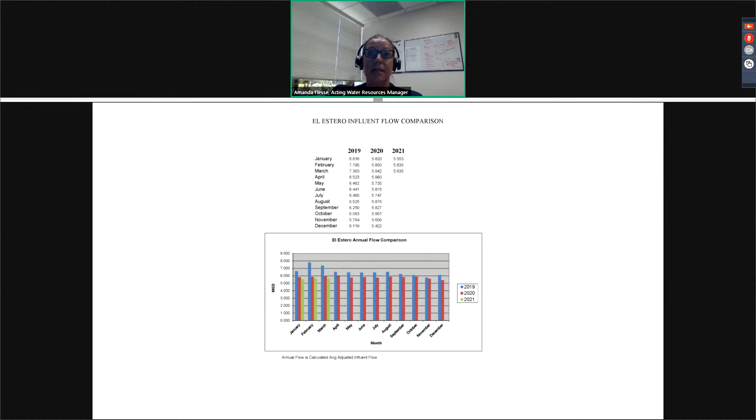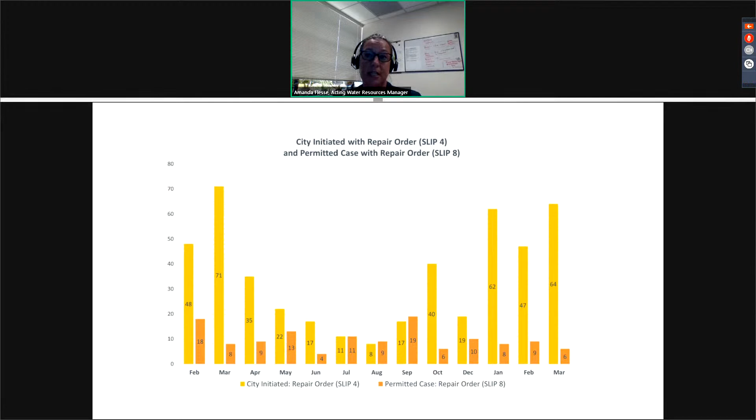The following slides are for SLIP, and these are mainly to show workload. This slide, SLIP 4, is a repair order initiated by our SLIP team—either we noticed something in our CCTV or they had a spill. We issued them a letter, they got it inspected, and in that inspection we noticed some defects requiring repair. Our SLIP 8 is when someone comes in for a permit for a remodel or ADU, and we ask for a review of their lateral. We noticed some defects, and they've been ordered a repair prior to receiving their building permit. This indicates how much we're finding in our CCTV program versus how many SLIP cases come in for permitted cases of people doing add-ons or other work to their homes.

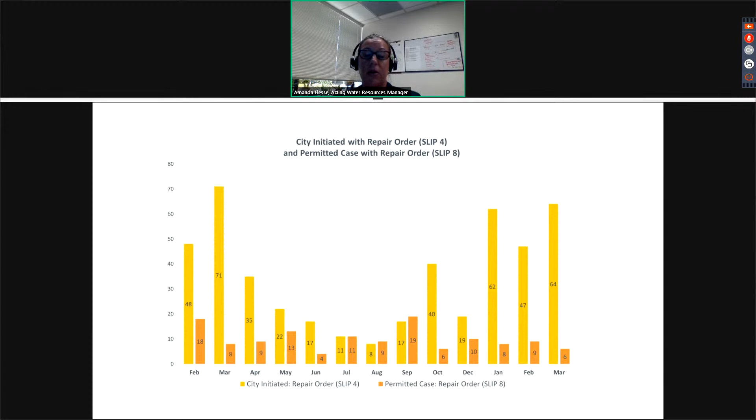This is another workload item, showing how many cases we've initiated and how many are coming into our building and safety review. You can tell which ones are in our building review. We haven't seen much curtailment from COVID impacts with our permit review—maybe a slight one, but not as big as we initially thought.

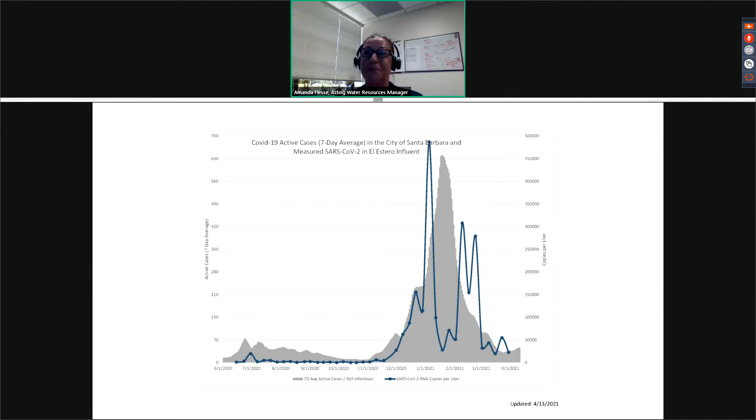And this is our COVID slide, the famous one we've all been monitoring for the past year. It's still trending down, which is a good thing, and hopefully it'll keep going down even more with vaccination rollouts now open to everyone. It'll be interesting to see over the next few months.

With that, we'll take any questions or comments. Thank you for the opportunity—I'm glad we had enough time to thoroughly explain each graph for everyone.

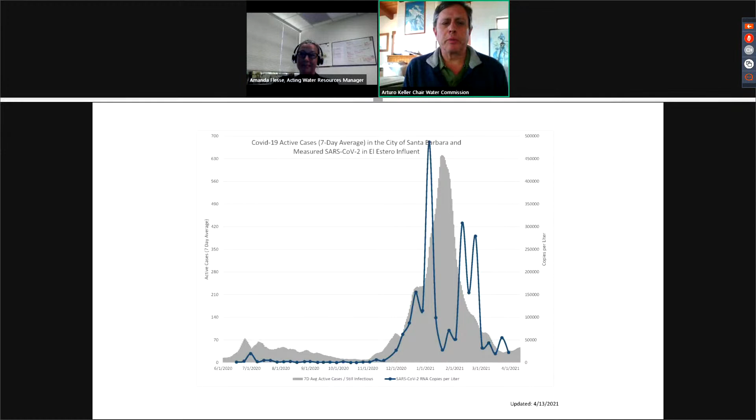Okay, thank you very much. Any questions or comments? We're a little bit over time, so let's not go too far. Commissioner Davis: just really quickly, remind me again what the water year is, month-wise? The water year begins October 1st and goes through September 30th. Great, thank you very much.